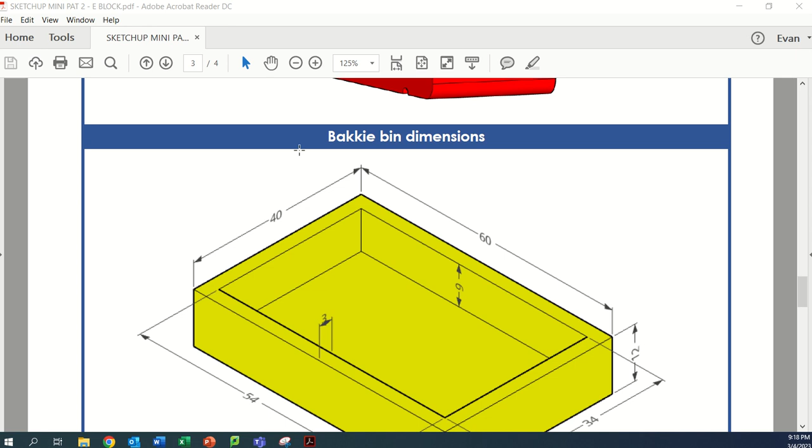Right, gents, this is tutorial number 2 of the toy Bakkie design and assembly. We are on, as I said, tutorial number 2, and in this tutorial we're going to look at how to create the bin for the Bakkie. We have all the relevant dimensions required to construct this.

Hopefully the first thing you can see is that this is quite simply a rectangular prism with a countersunk hole of 9 millimeters. So we're going to work with the rectangle command and then use our push and pull, offset, then push and pull to develop this. So the dimensions for the rectangle are 40 by 60.

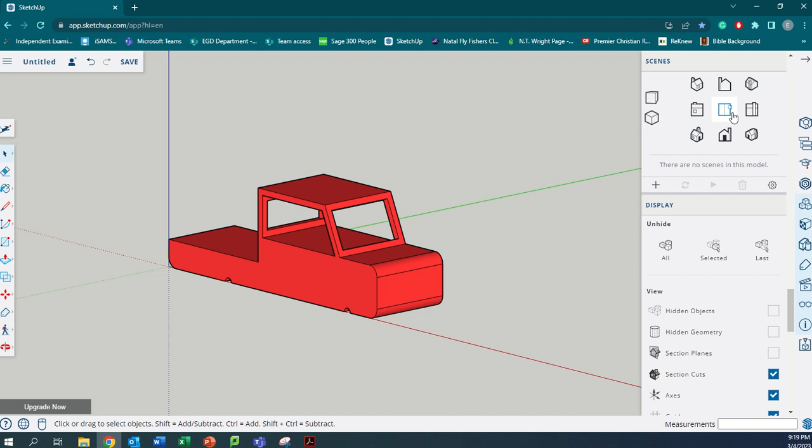So as we go across to SketchUp, we want to orientate ourselves to get a position in which we can work, and we want to do that in the top view. I'm going to then pan across this way, rectangle out, and I can start anywhere, so it doesn't really matter. I'm going to start there just so that you can see. Then I'm going to go 60, 40, enter. Right, 60, 40, that gives us the dimensions that we require.

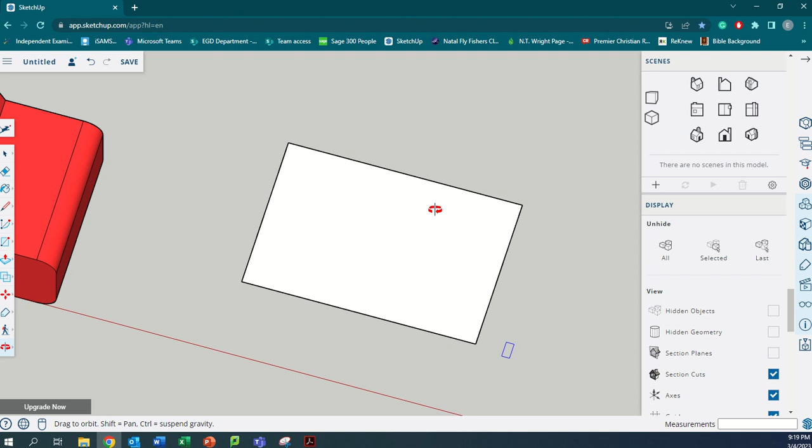So I'm going to then move this way and get into a nice perspective, and I'm going to pull it up, push-pull, a total distance of 12 millimeters. So we're going to push-pull, 12 millimeters, and hit enter. Then we need this little framework on the outside, or alternatively we need to work out that rectangle on the inside and then pull it down. And the only information we have is the 3 millimeter offset from the outside edge.

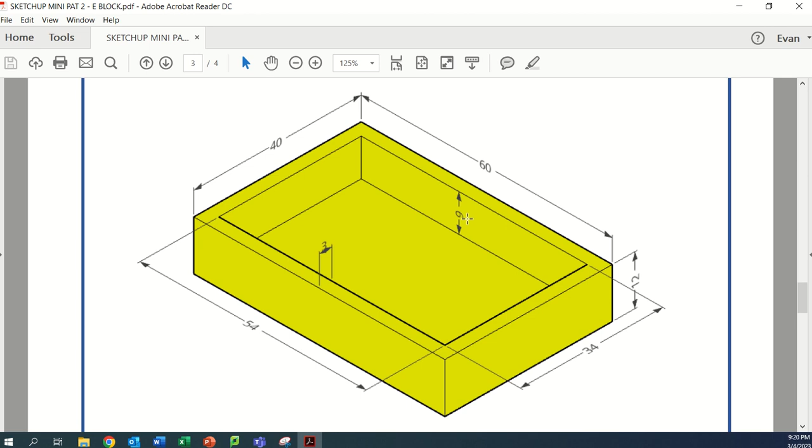So we're going to take our offset command, click on the top, move our mouse in, make sure we type in 3 and enter. We then know that we can bring that middle rectangle down a total of 9 millimeters. So I'm going to go to my push-pull command, click, drop it down, enter 9, enter. Right, so there it is.

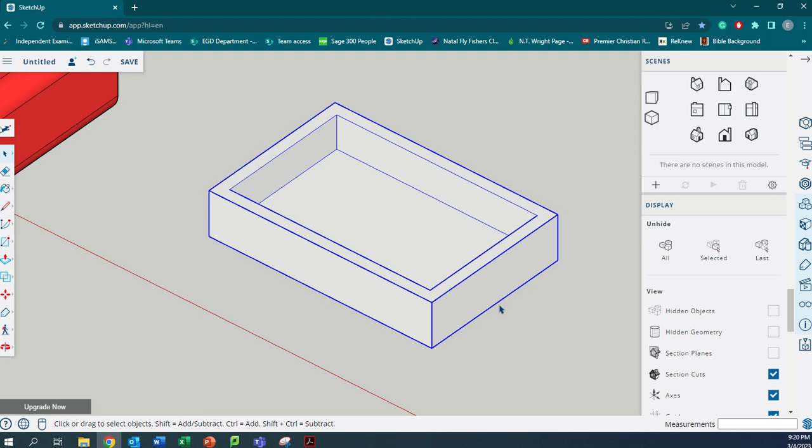The bin is being created, so we're going to triple click as always. Triple click the whole thing, then right click, make a group. Then we're going to get some materials, and we want yellow. You can choose the yellow you prefer, add it to the bin, and then we're going to add a tag as well. We add another tag, and we're going to call that Bakkie bin.

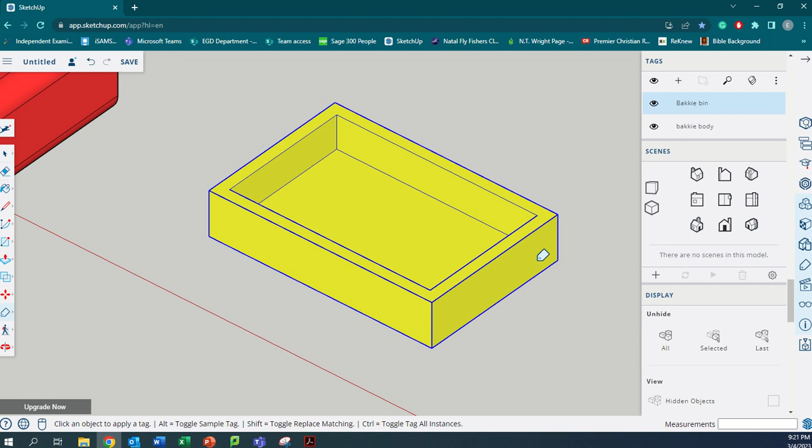Press OK. Make sure that it's highlighted blue, and then we're going to add the tag. And make sure that when you click it, you'll see the purple highlights come around as a frame. That means it's been tagged as Bakkie bin; to make sure, you can click the eye off and back on. So that is the bin created. And now what we need to do is go and assemble the bin onto this Bakkie.

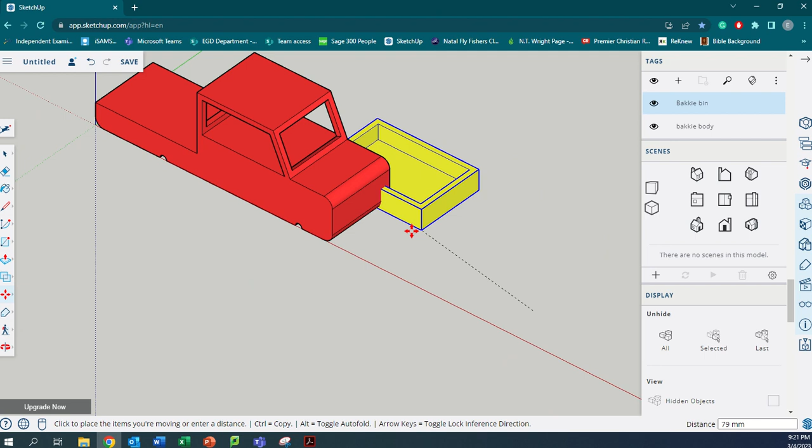So I'm going to hit the move command, and I'm going to grab this Bakkie bin by that corner and go find its corresponding corner on the back of the Bakkie, which should be there. And if we pivot around and we are accurate, we should have a bin that sits flush on the back of that Bakkie. And there we have it, a perfectly situated and assembled bin for the Bakkie.

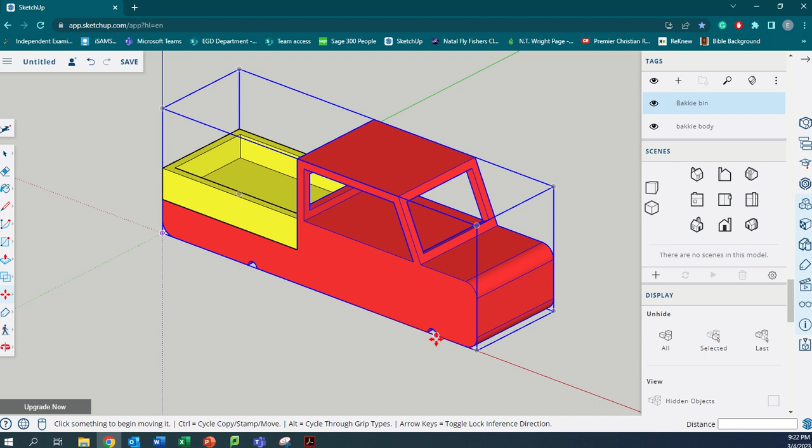So that's the end of video tutorial 2. In the next video, we'll be doing the axle and both the wheel dimensions, construction, as well as assembly.